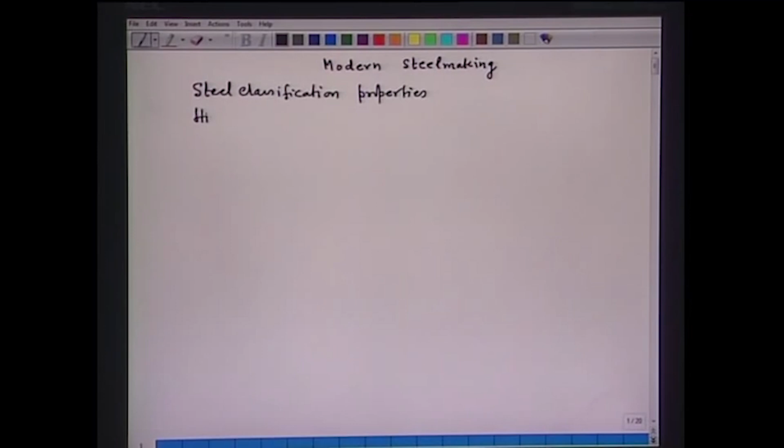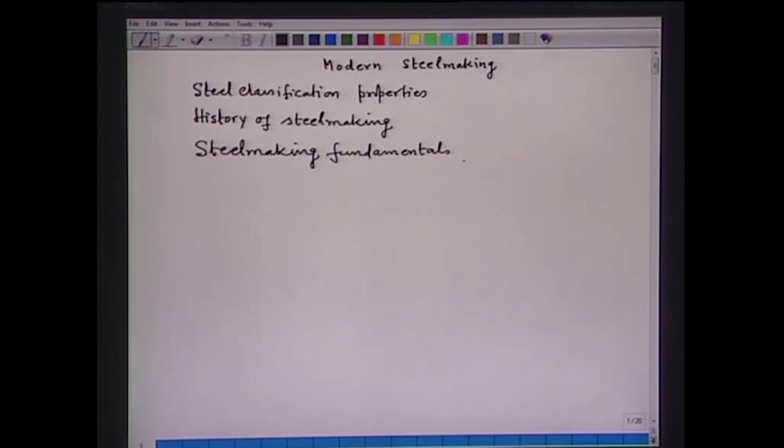I will be lecturing on modern steel making. The lecture will essentially comprise of steel classification, properties, history of steel making, which will be followed by steel making fundamentals, and after covering steel making fundamentals, I will be covering practice of steel making. In practice of steel making I will be covering oxygen steel making, and subsequently electric arc furnace steel making. So, this will be the organization of the various lectures that I will be delivering to you.

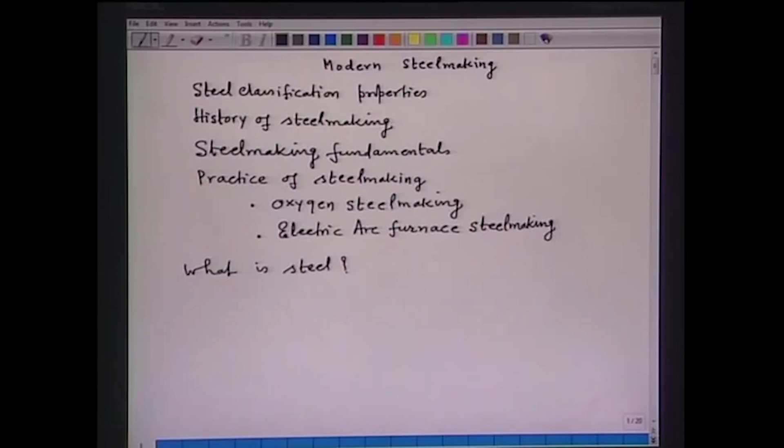So, as such I will be starting first of all to tell you what is steel. The whole idea is that you can appreciate the importance of steel in the modern economy. Now, the first point is that steel is an alloy of iron and carbon.

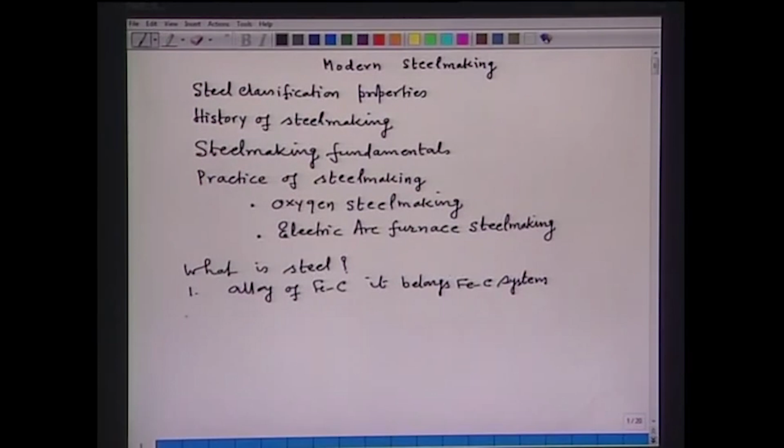Steel belongs to the iron carbon system. Now, this iron carbon system has a unique property.

Of alloying with several elements of the periodic table. With that I mean that there are elements like cobalt, nickel, chromium, vanadium, tungsten, molybdenum, and name any other element. This iron carbon system has the capability to have some solubility of that element, and it imparts an altogether different property in the steel, or you can call it altogether a different material.

Third, this iron carbon system is also capable of creating different properties by altering microstructure through heat treatment and deformation processing. So, this is somewhat a very unique property that this iron carbon system has.

I repeat once again, iron carbon system is capable of creating any desired service property by altering microstructure through heat treatment and deformation processing. So, this is somewhat a very unique property that this system has.

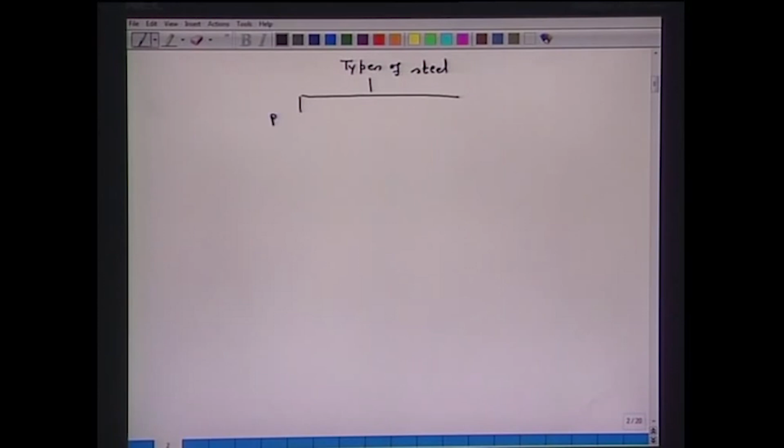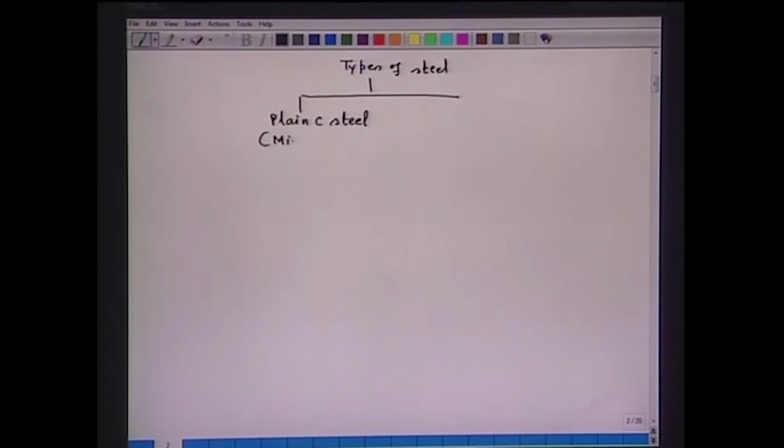So, types of steel - essentially we can classify in two broad categories. The first is plain carbon steel. Plain carbon steel is also called by the name mild steel, or sometimes it is also simply called carbon steel. The other is alloy steels.

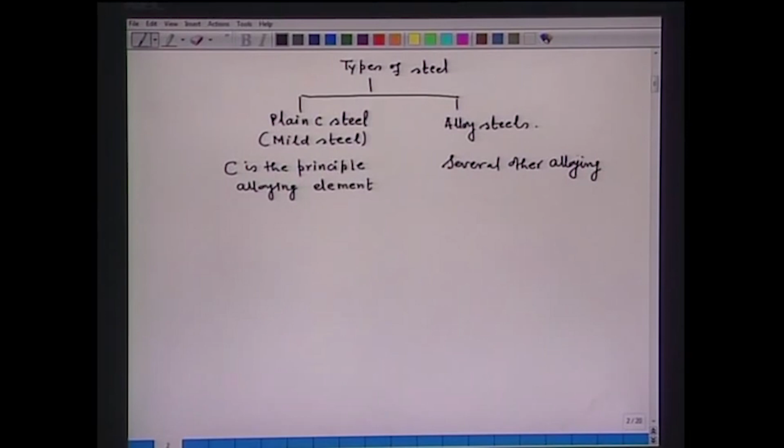In plain carbon steel, carbon is the principal alloying element. In case of alloy steels, they also contain carbon, but besides carbon, the alloy steels have several other alloying elements like cobalt, chromium, nickel, molybdenum, tungsten, vanadium, etc. All these alloying elements are added in order to get a special property for a particular application.

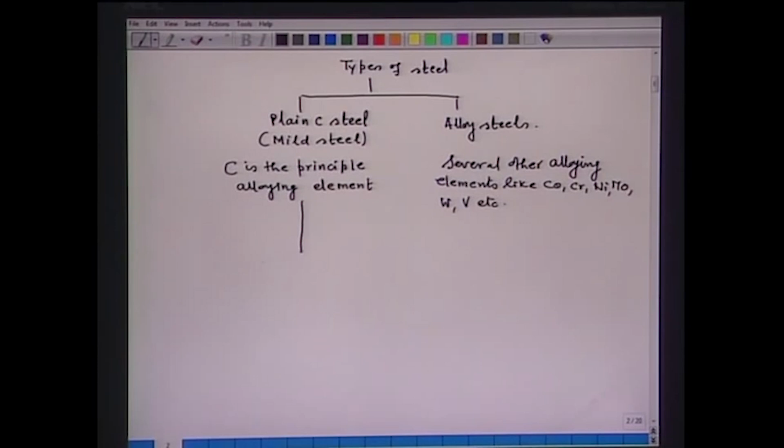Now, let us further classify the plain carbon steel. So, plain carbon steel we can classify based on the carbon content. So, first of all we have low carbon steel. In the low carbon steel, carbon content is less than 0.25 weight percent.

Now, the property that these steels have - they possess excellent ductility and toughness. They are also weldable and machinable. But a little bit of a disadvantage is that they are not amenable to martensitic transformation.

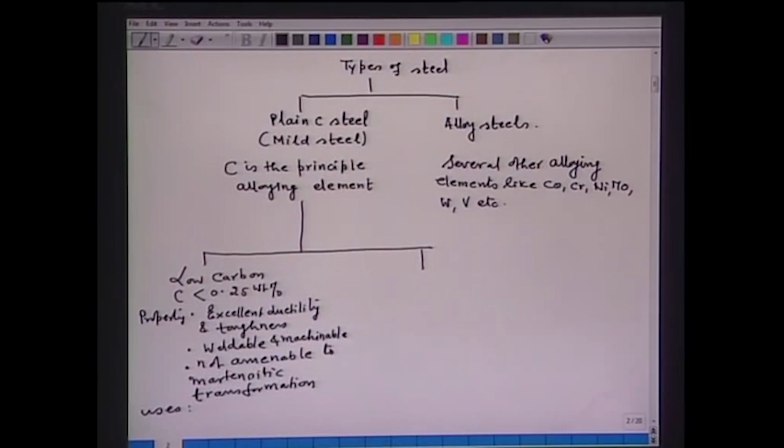Now, as regards uses, these low carbon steels are commonly used in industrial products like bolts, nuts, sheets, plates, and products derived from there. Another important type of plain carbon steel is the medium carbon steel. In the medium carbon steel, carbon is in between 0.25 to 0.6%, that is, weight percent.

Now, among the properties, these steels have low hardenability, and a very important property that these medium steels possess is that they can be heat treated.

They can be heat treated. What does it mean? As I said in the beginning, showing the importance of steel, the iron carbon system is capable of creating unique properties by altering microstructure through heat treatment and deformation processing. So medium carbon steel, if it can be heat treated, you can get from one type of steel several different steels by simply heating and cooling at different rates. That is the important advantage of medium carbon steel, and as a result several important mechanical or service properties can be induced in the material.

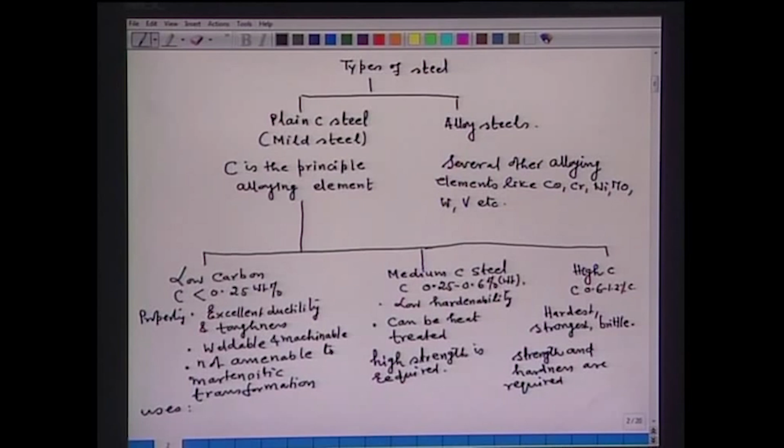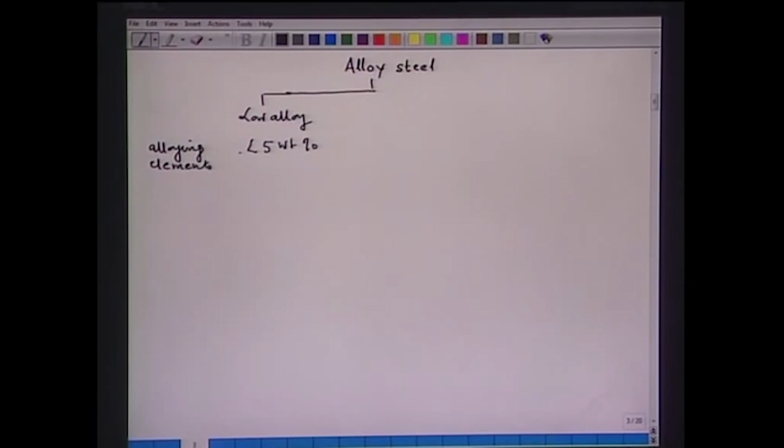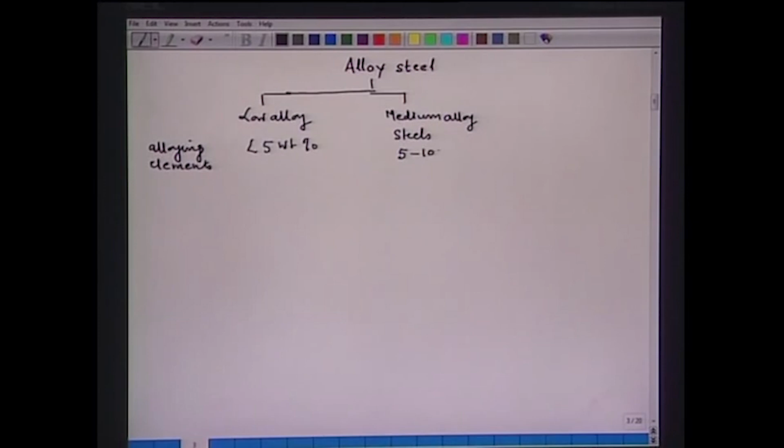Now let us see the classification of alloy steels. Among alloy steels, we have low alloy steel, where the alloying elements are less than 5%. Then we have medium alloy steels, where the alloying elements vary from 5 to 10%. And then we have high alloy steels, where the alloying elements are greater than 10%.

Now these alloying elements are added to improve properties like hardenability, strength, toughness, wear resistance, and to provide, for example, stainless property. For example, addition of chromium gives you stainless steel, etc.

So now remember, all these alloy steels also have carbon content, which may vary. Low alloy steel may have 0.2, 0.3% carbon, and accordingly carbon content is present in all alloy steels.

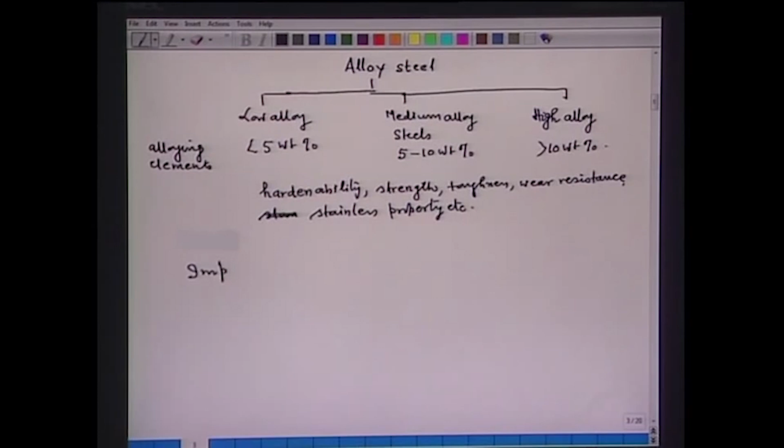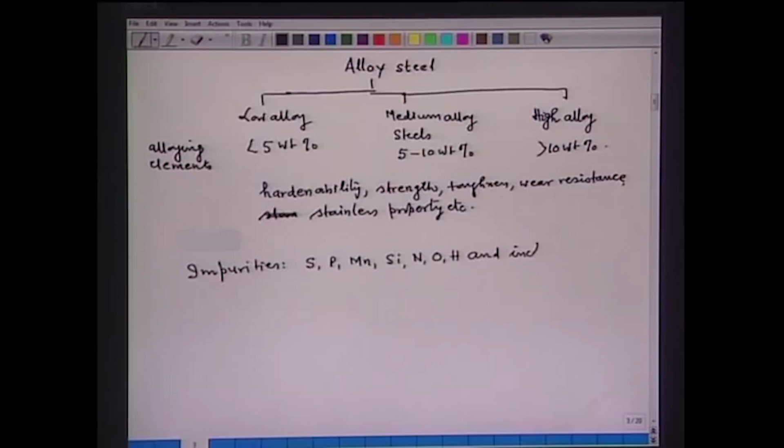Now, whether we have plain carbon steel or alloy steels, all steels contain impurities like sulfur, phosphorus, manganese, silicon, nitrogen, oxygen, hydrogen, and inclusions. These impurities originate during the steel making stage, because when you produce steel from hot metal or pig iron, these impurities are carried over to the steel. Partially we can remove them while converting hot metal to steel, but still these impurities enter through the steel making stage.

So what is required is that their content must be controlled for a given application, because these impurities cannot be tolerated in large quantity. Certain applications require strict control over the presence of these impurities. Let me give some examples: I'll put application, then tolerable impurity level, and then maximum size of inclusion. These are just a few examples — the rest you can see from the books and build your knowledge.

Say, for example, steels for bearings — they can tolerate total oxygen less than 10 ppm, and inclusion size should not be greater than 15 micrometers, which is very small.

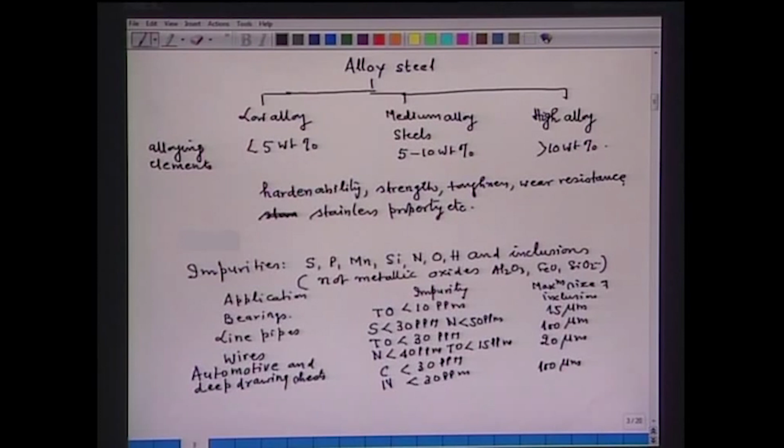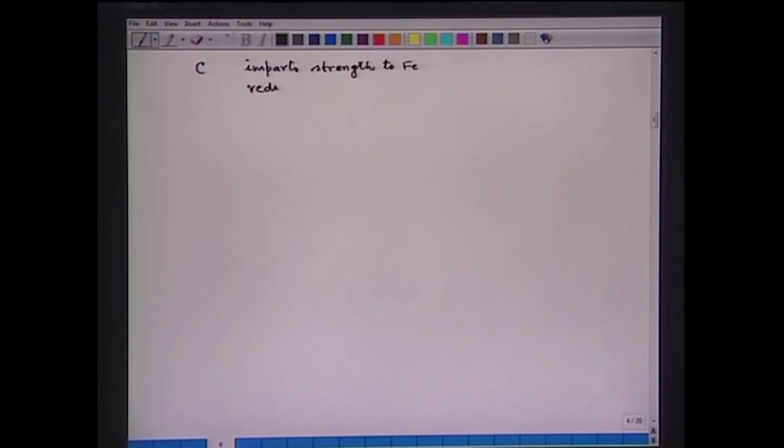Now, in general, if we want to explore the effect of impurities on mechanical properties, since ultimately this steel will be put into application: carbon imparts strength to iron. Remember, pure iron is very ductile and is not useful for any application. But at the same time, carbon reduces ductility and impact strength.

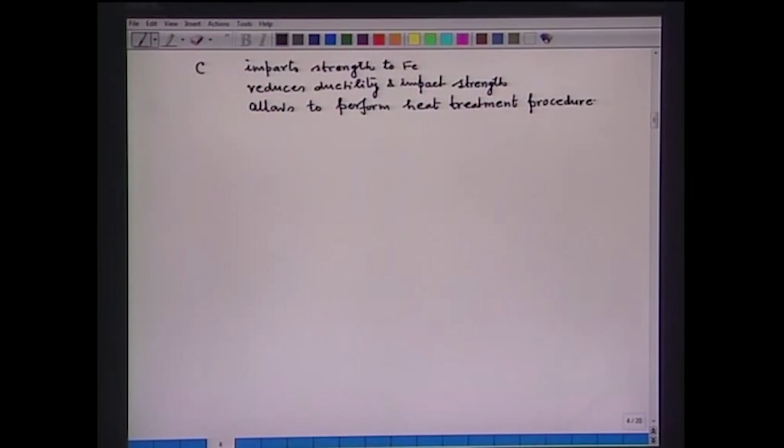A very important property that carbon has is that it allows us to perform heat treatment procedure. Heat treatment is one of the main technologies to alter the microstructure of the steel and hence to create a different material.

Now regarding another impurity, sulfur. Sulfur essentially causes hot shortness, due to the presence of FeS at the grain boundary. FeS has a melting point of 989 degrees Celsius. So when sulfur containing steel is subjected to deformation processing, we have to heat it, and most deforming processing operations require steel to be heated above 1000 degrees Celsius. In that case, the FeS, if present at the grain boundary, will melt and create a lot of problems, and that is called hot shortness.

Now, the formation of this FeS can be understood by considering the coefficient of distribution of sulfur between solid and liquid. When steel solidifies, the sulfur segregates, because the distribution coefficient, also called segregation coefficient, equals percent sulfur in solid upon percent sulfur in liquid, and this value is around 0.02.

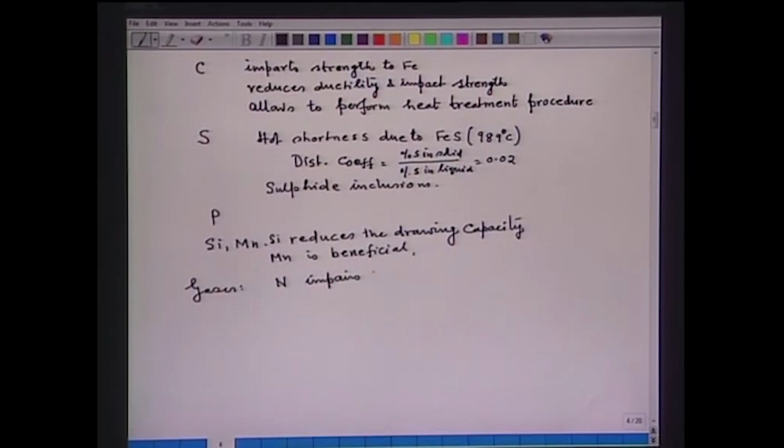The presence of gases, for example nitrogen, impairs plastic properties. Then hydrogen causes defects such as flakes, etc. The presence of oxygen forms oxide inclusions.

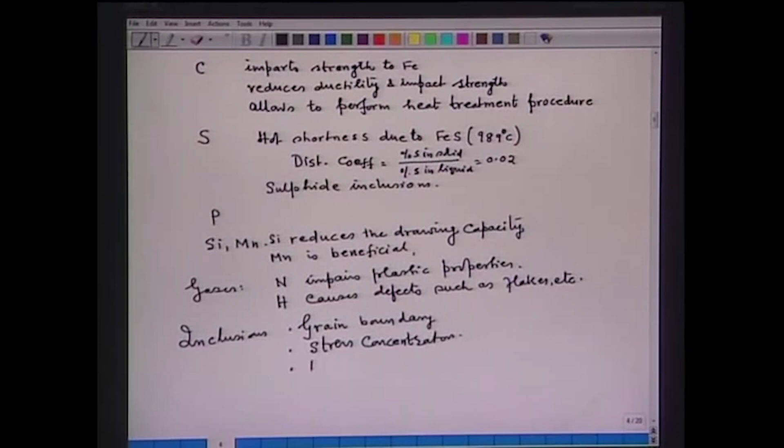So the next important thing is inclusions. They are present at the grain boundary. If present there, they weaken the intergranular bonds. Second, inclusions also act as stress concentrators. Also, some types of inclusions are brittle. So what happens if you roll them? Brittle inclusions will crack and accordingly you will get cracks. So these are some of the deleterious effects of impurities on the properties of steel.

There are several other effects on mechanical properties. I will request you to go through the books and make yourself up to date.

Now, in some steels which are produced from scrap, sometimes tramp elements are also present, and these tramp elements are very harmful because they have very low melting points. For example, copper, tin, antimony, lead, zinc - they are all called tramp elements, but their source in steel is from the scrap. So having known an overall bit of steel classification and impurities, now let us pursue the history of steel making.

That is, now we have to produce it, and the history of modern steel making. In 1856, Henry Bessemer developed a process for bulk steel production.

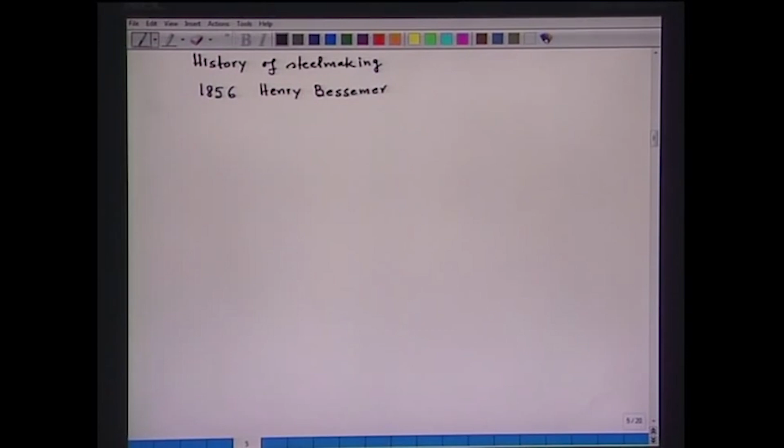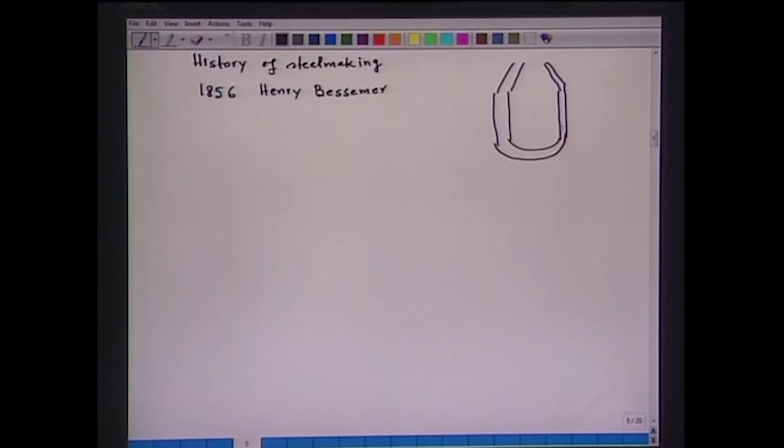No heat was supplied from outside, because he knew that most of the refining reactions are exothermic in nature. What he did was construct a pear shaped vessel lined with acid refractory material, and through the bottom of the vessel he blew air into the metal.

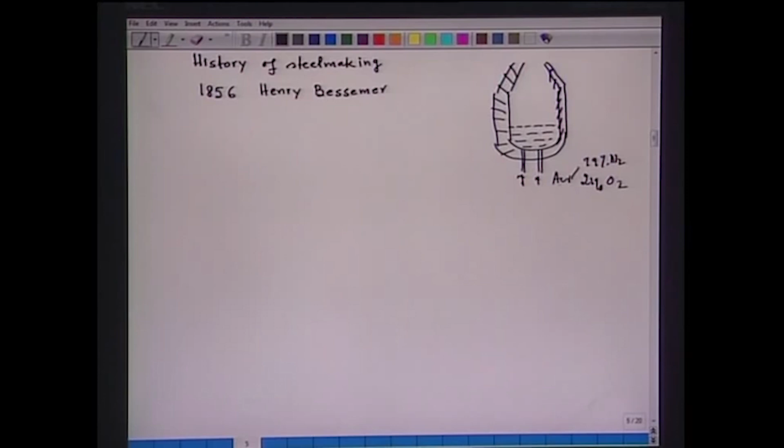So through the bottom he blew air, and air contained 79% nitrogen by volume and 21% oxygen by volume. As a result, reactions between iron, carbon, silicon, and manganese proceeded, and he was able to produce steel from hot metal. What was the problem he faced? He could not reduce the phosphorus content of hot metal, because of the acid lining he had put in the vessel.

This is the acid lining and this is the hot metal. By virtue of the acid lining, it was not possible to remove phosphorus. So the problem faced was that sulfur and phosphorus could not be removed, and the oxygen content of steel was also very high.

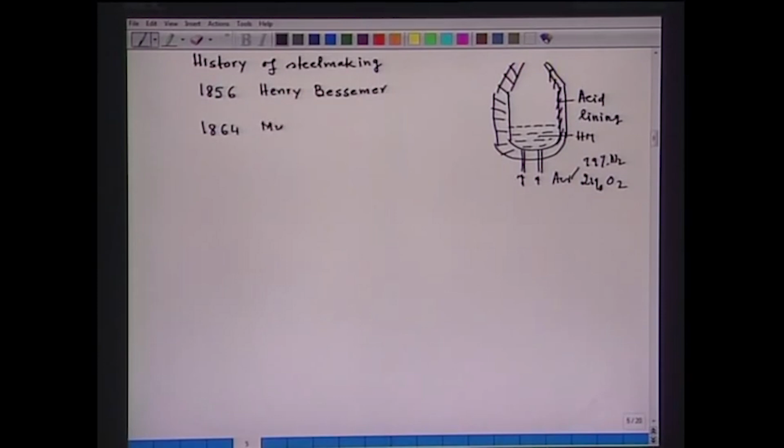Around 1864, Mushet developed an iron manganese alloy. With this development, it became possible to reduce the oxygen content of steel.

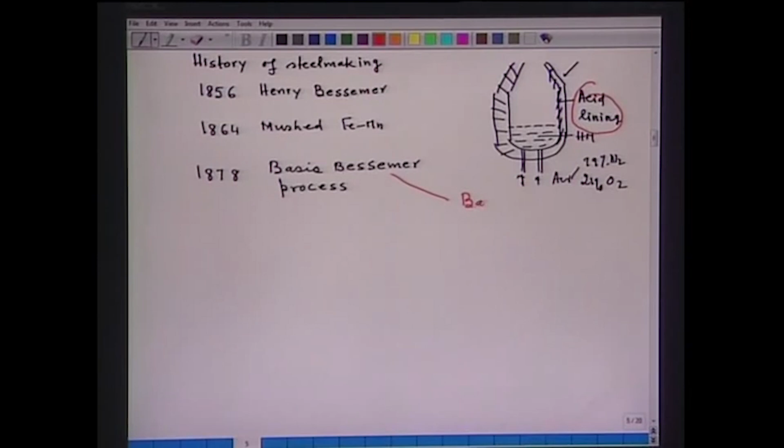Around 1878, a basic Bessemer process was developed. The essential difference between the two: the shape of the vessel is the same as shown. All that was done was, instead of acid lining, the basic Bessemer process employed basic lining. That was the only difference. As a result of the basic lining, it became possible to remove phosphorus from the hot metal. So with the advent of the basic Bessemer process of steel making, it became possible to reduce phosphorus also.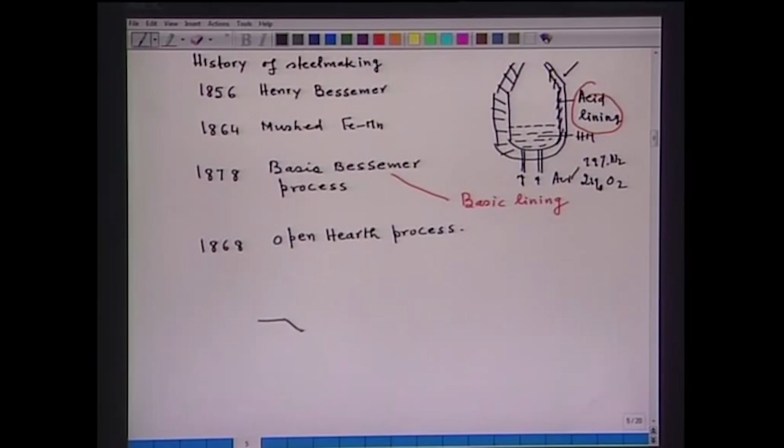Around 1868, the open hearth process was developed. It has a very shallow refractory lined tray. Let me try to draw this. So the shallow tray, this is the refractory lining.

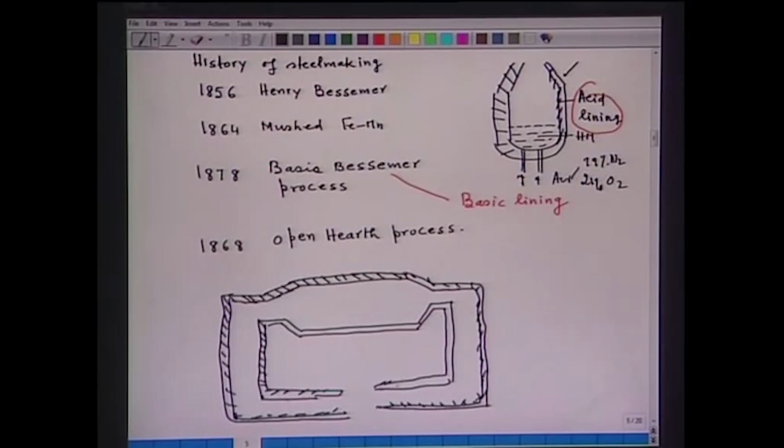All the refractory lining here, acid lining or basic lining, both were used in open hearth. So this I will put as a refractory lining. This is the roof, and from here is the provision for injecting fuel, that is an oil burner. Somewhere here you have the metal, and here is the slag. This I will call the hot metal.

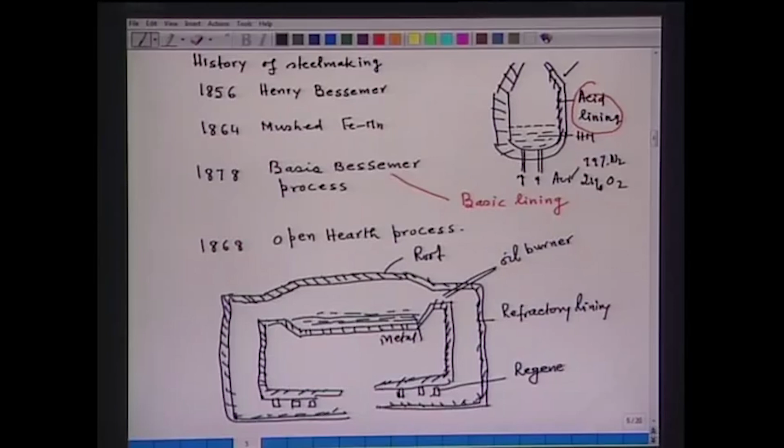These are the so-called regenerators, used to preheat the air, and here was an air valve. This is the valve for reversal. In one cycle, here goes preheated air, then here exhaust gases go out. So one regenerator is on the heating side, another on the cooling side. When on the heating side, preheated air passes through this, and exhaust gases go through the other outlet. That was the whole idea of employing two regenerators.

So the essential feature of this open hearth process is that it was a shallow refractory lined tray with a roof over it, and the charge for this. Since heat was being supplied from outside, as seen in the oil burner, the charge consisted of steel scrap plus hot metal plus iron ore plus lime. It was introduced through the doors. Source of heat was combustion of gaseous and liquid fuels.

Since it was possible to use an outside source of energy, any amount of scrap could be melted, so the process was highly flexible. The time was around 6 to 8 hours. This open hearth steel making dominated steel production for a very long time, because though the basic Bessemer process solved the problem of phosphorus content of steel, the nitrogen content of steel was still very high. Because of this, though people used basic Bessemer in those periods, open hearth process was still predominantly used.

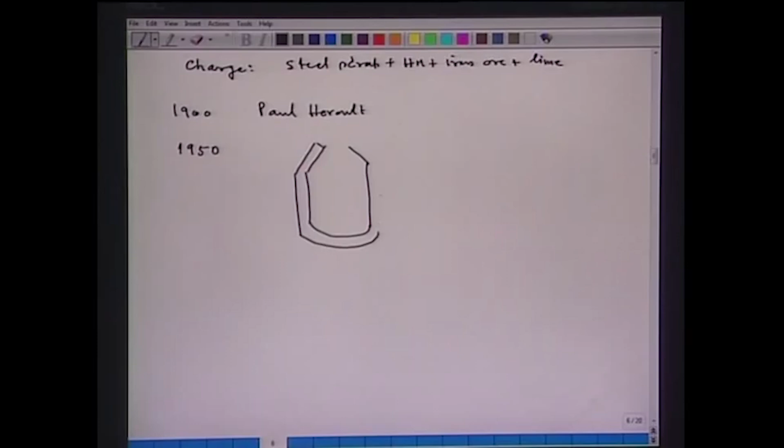In 1950, at Linz and Donawitz, a process was tried wherein, in a pear shaped vessel with this refractory lining, this is the hot metal, oxygen was blown from the top. Pure oxygen was blown from the top, and this converted hot metal to steel. This technology revolutionized the steel industry because it was highly flexible. There was no problem with the plugging of the bottom tuyeres as there was in basic Bessemer. The only problem is that in the beginning they used mild steel as the material of the lance, which was melting, but later development took place, and this process became the modern steel making.

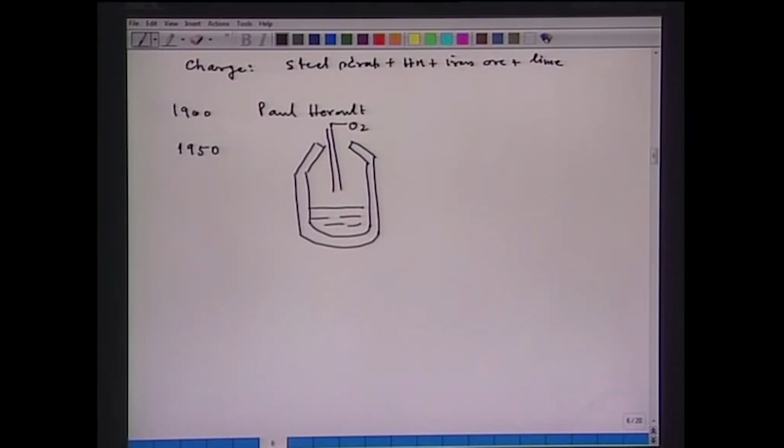Parallel to these developments, the ladle was also explored for use as a reactor, and as a result several secondary steel making processes also came into existence.

There were a large number of secondary steel making processes developed around the 1960s, and in the 60s this top blown oxygen steel making was also converted to top and bottom blowing steel making. That is how the modern steel making through top and bottom blowing has come into existence.

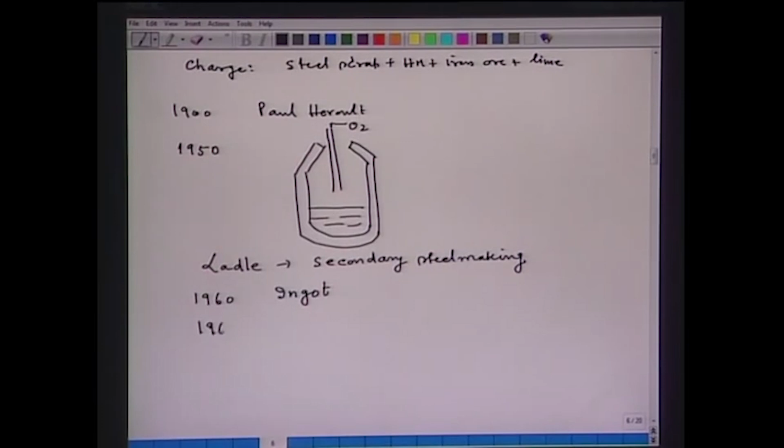For more than 150 years, till 1960, ingot casting was the predominant route for casting liquid steel. Around 1960, continuous casting of steel was developed, and this has also revolutionized the steel industry.

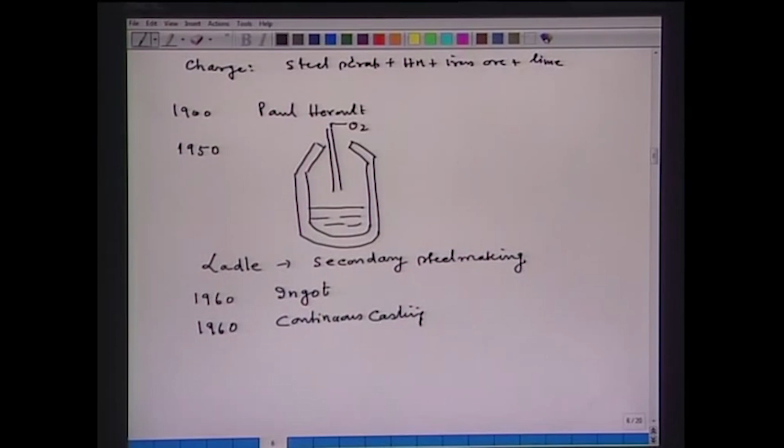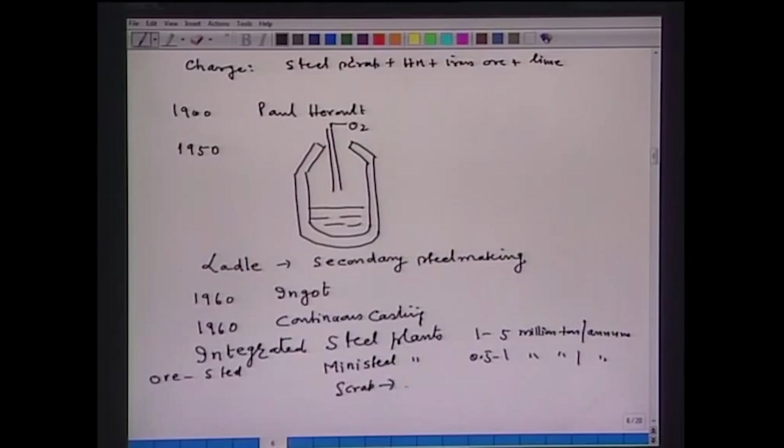The present status of steel industry comprises integrated steel plants, whose capacity may vary from 1 to 5 million tons per annum, and mini steel plants, with capacity ranging from 0.5 to 1 million tons per annum. The essential difference is that an integrated steel plant starts from ore and produces steel, whereas a mini steel plant mostly uses scrap to produce steel.

We have long products and flat products, both of which are being produced. Now, a rough idea of world steel production.

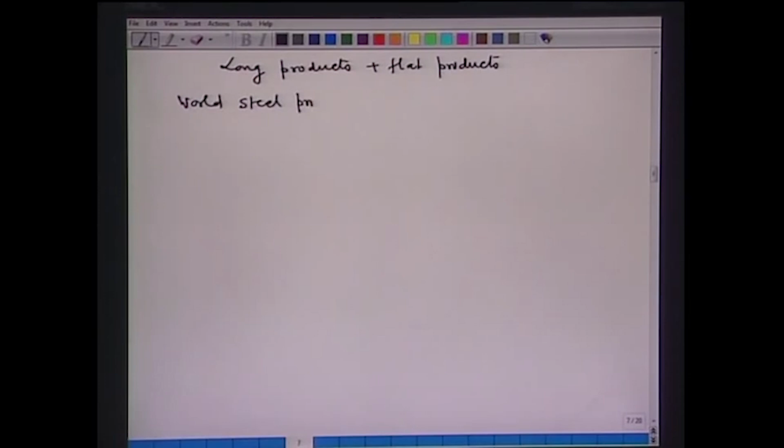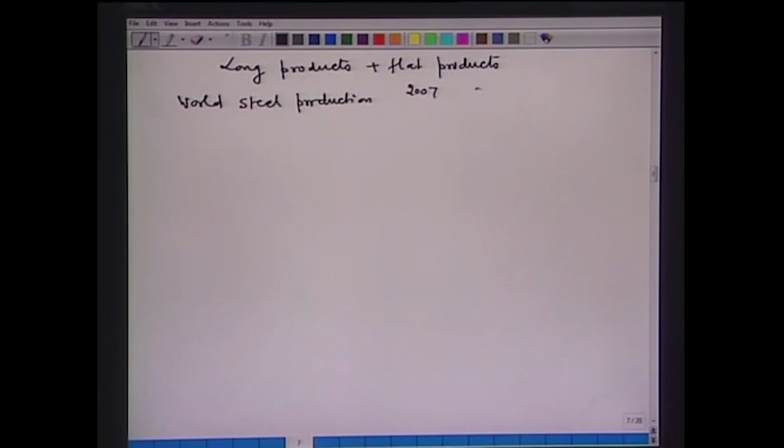World steel production: in 2007 we had 1.3 billion tons. In 2008 it rose to 1.42 billion tons. The expected projection for the year 2011 is around 1.6 billion tons.

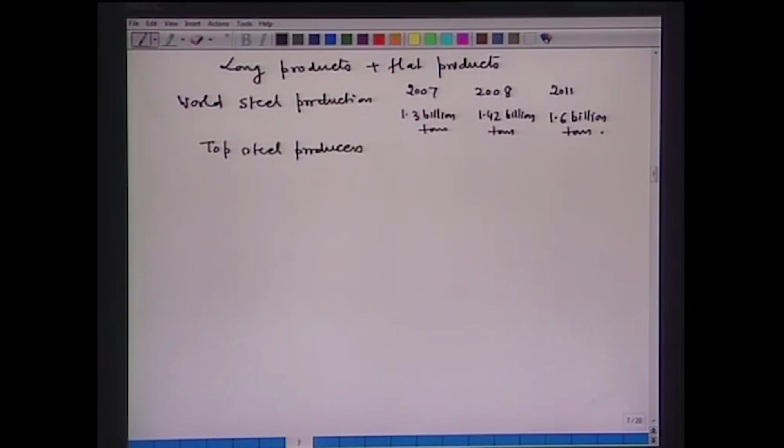Some of the top steel producers: ArcelorMittal, data for 2007, produced 116.4 million tons and ranked number 1. Then second was Nippon Steel, which produced 35.7 million tons and ranked number 2.

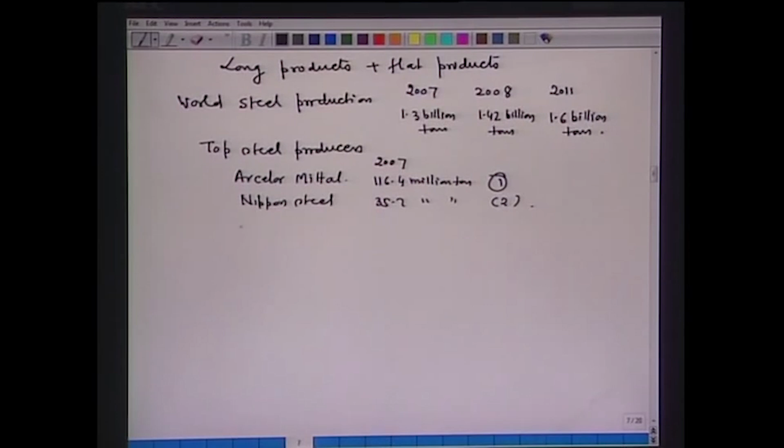POSCO, which is in Korea, produced 30.1 million tons and ranked number 4. Tata Steel produced 26.1 million tons and ranked number 8. SAIL, Steel Authority of India Limited, produced 13.9 million tons and ranked number 21. Voestalpine, which is in Austria, produced around 6.9 million tons and ranked around number 43.

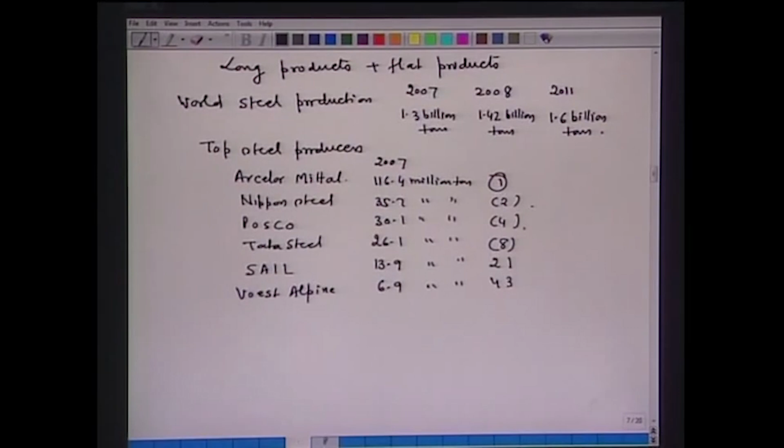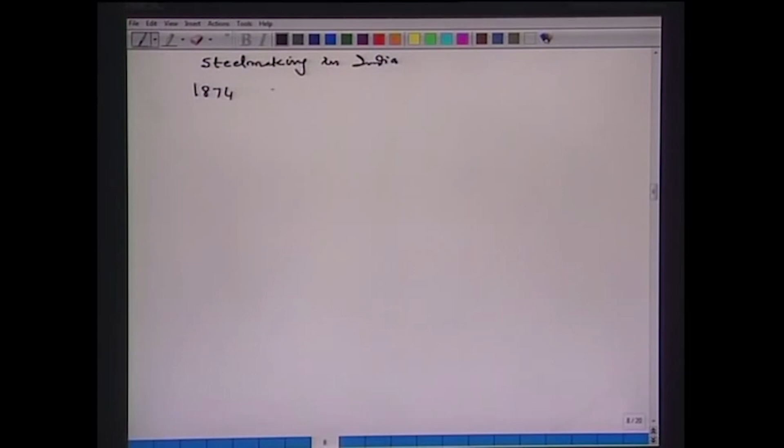Now, following a brief historical background of steel making in India. The first attempt to produce steel in India was made in 1874 when Bengal Iron Works came into existence.

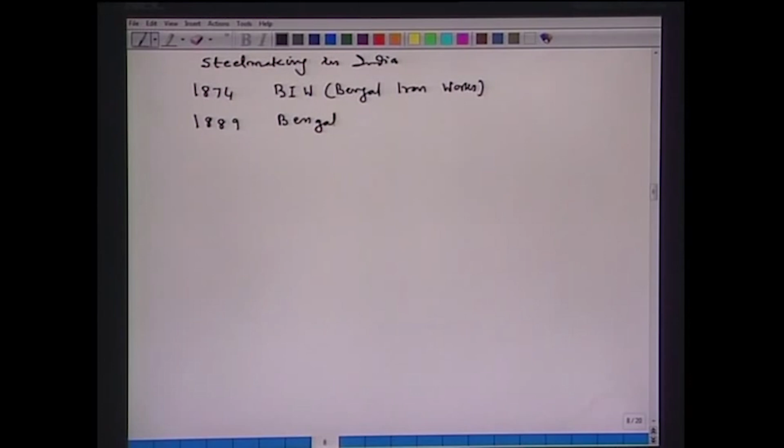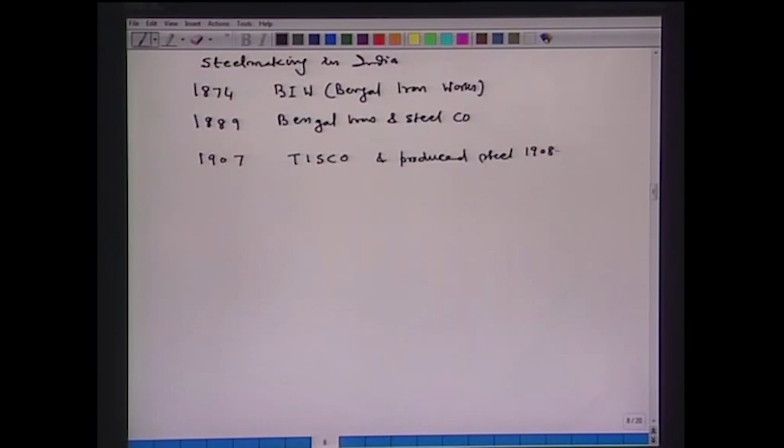In 1889, Bengal Iron and Steel Company acquired BIW and continued to produce steel until it was taken over by ISCO in 1936. In 1907, Tata Iron and Steel Company was formed by Jamshedji Tata, and produced steel in 1908-1909. In 1918, the Mysore government decided on a steel plant at Bhadravati.

In 1953, through the vision of Pandit Jawaharlal Nehru, an integrated steel plant in the public sector at Rourkela, with German collaboration, came into existence. Since then, Bhilai was added in Madhya Pradesh, then came Durgapur, then came Bokaro, and then came another steel plant in Visakhapatnam.

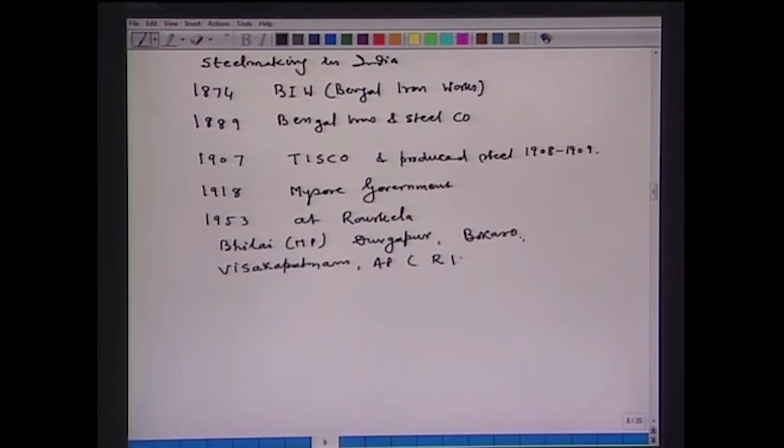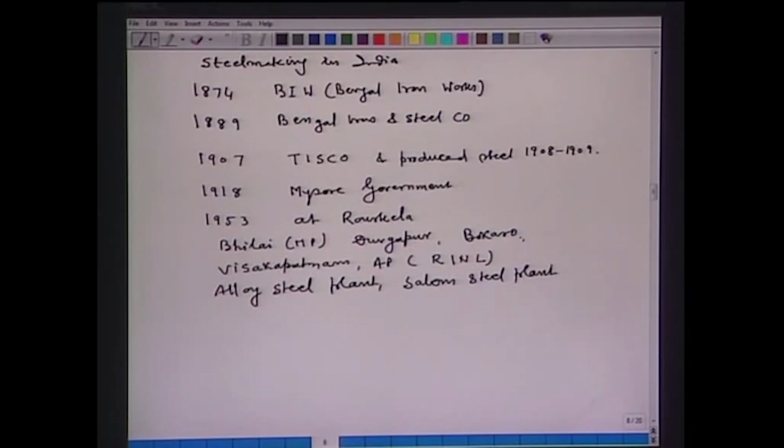Visakhapatnam in Andhra Pradesh came under Rashtriya Ispat Nigam Limited, RINL. Then also came the alloy steel plant at Durgapur and Salem steel plant were also added. The Indian steel industry is organized in 3 sectors.

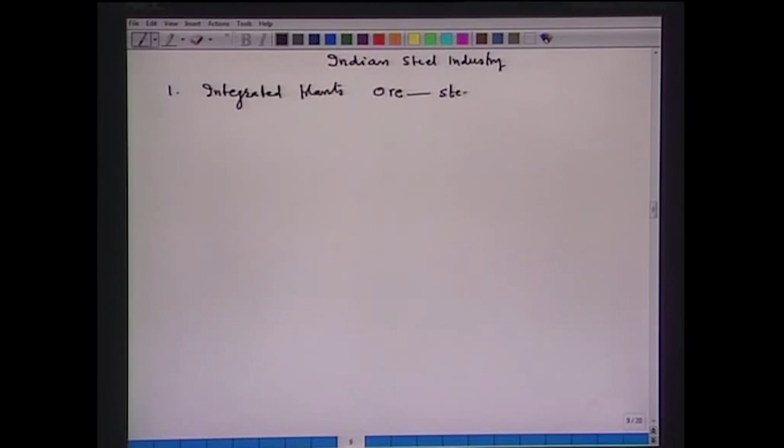The Indian steel industry is organized in 3 sectors. First, integrated plants, which use ore and produce steel. These integrated steel plants exist in the public sector and in the private sector.

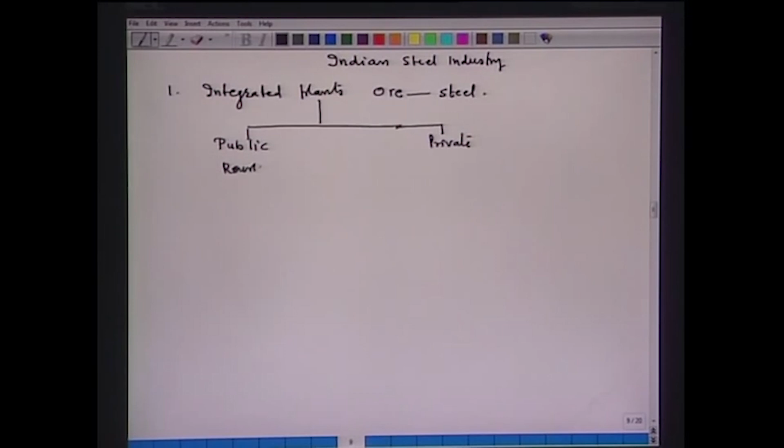In the public sector, as already mentioned, we have Rourkela, then Bhilai, Durgapur, Bokaro, Salem, the alloy steel plant at Durgapur, then Visvesvaraya Iron and Steel Plant at Bhadravati, and Indian Iron and Steel Company at Burnpur. All of these come under the company called SAIL, Steel Authority of India Limited.

Another organization is RINL, Rashtriya Ispat Nigam Limited, under which comes Visakhapatnam Iron and Steel Works. In the private sector we have, for example, TISCO, Tata Iron and Steel Company. Then Essar Steel Plant, Ispat Industries, Jindal Steel Plant, Jindal Steel and Power Limited, and so on. This is the integrated sector.

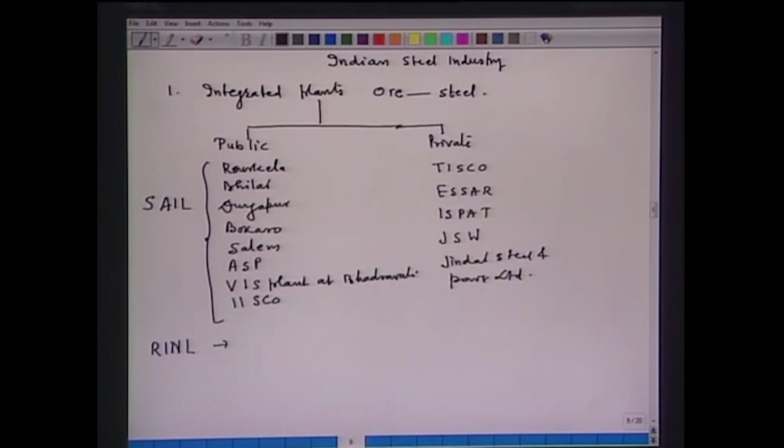Another sector is the mini steel plant, which uses scrap and produces metal. There are several mini steel plants; I will just mention a few: Uttam Steels, Kalyani Steels, Mukund Limited, Usha Martin, etc. You can add a few more to update yourself. This is the second type of sector.

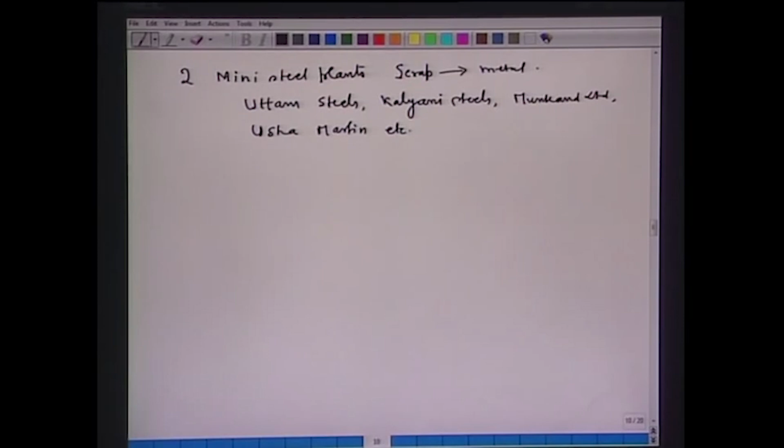This is the second type of sector. The third sector, which has grown very fast in the last 10-15 years, is the induction furnace sector.

Now, this sector uses scrap, the same thing, scrap and produces steel. This particular sector is dispersed all over the country.

Now, in India, say in 2007, India produced 53.1 million tons of steel. In 2008, it produced 55.2 million tons of steel.

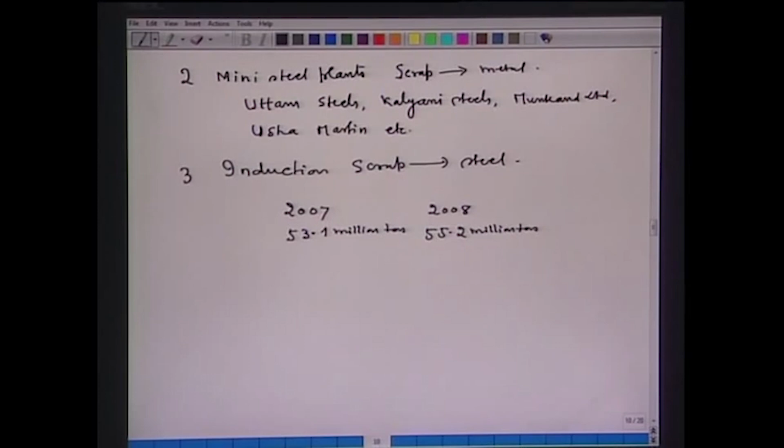Then POSCO and Mittal, each will add 12 million tons capacity additional. TISCO will add around 28 million tons additional capacity.

If you want further detail, you can see the article by A. Chatterjee. It gives various other details on iron making and steel making. Ironmaking and Steelmaking, volume 36, number 7, 2009, page 491. So there you can find several other details.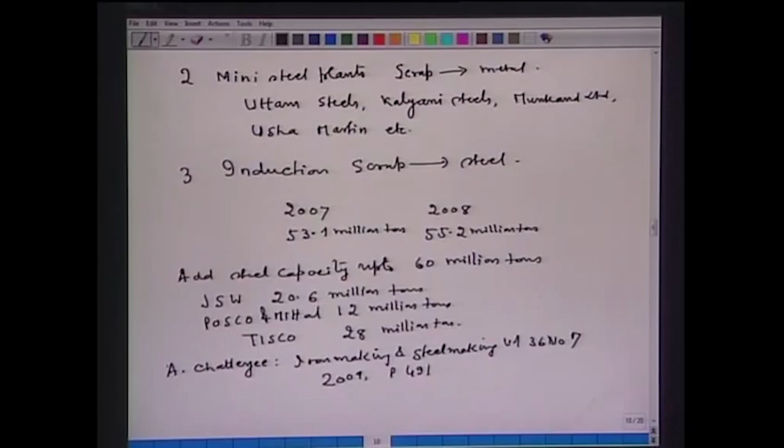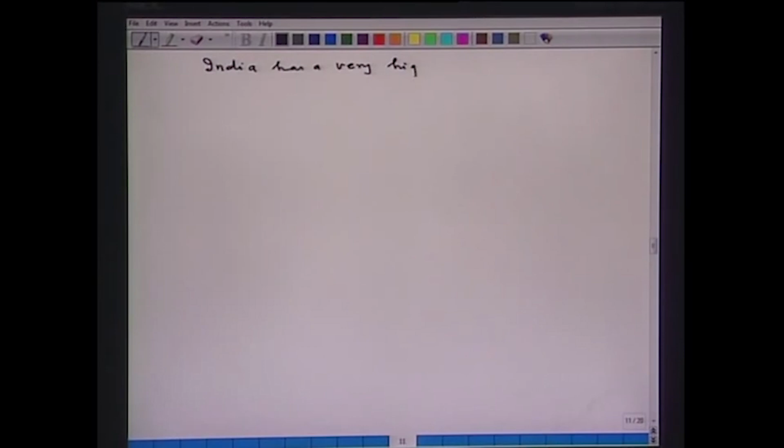India has a very high growth potential for steel. India has a very high growth potential. Why?

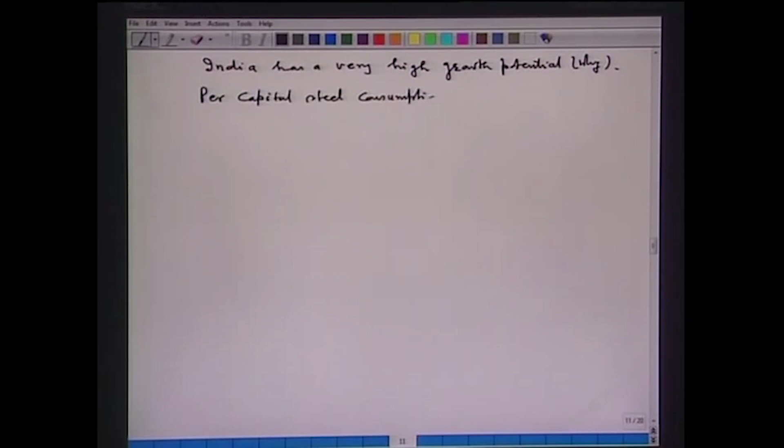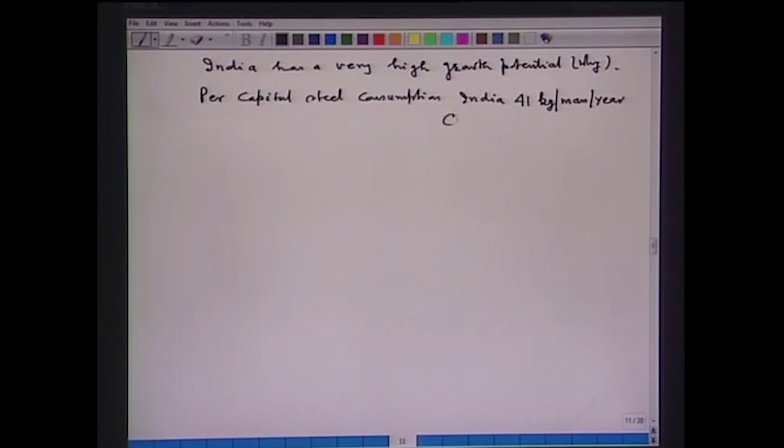The first reason is per capita consumption of steel, per capita steel consumption, which is considered to be a sign of prosperity. India: 41 kg per man per year. China: 271 kg per man per year. USA has 404 kg per man per year.

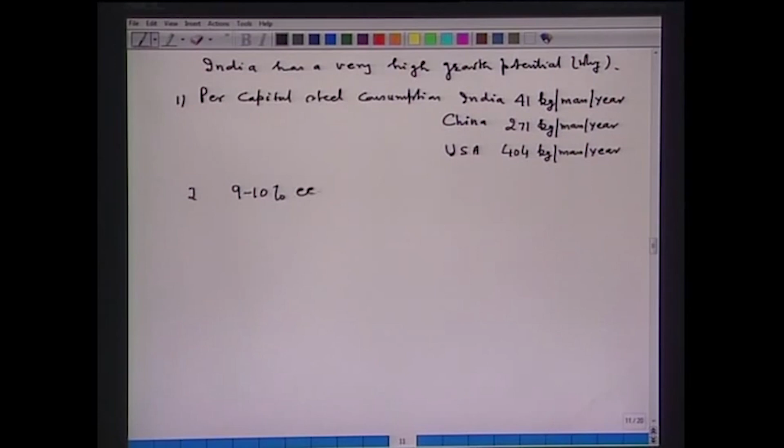That's the one reason. Second reason is that it is expected a very high economic growth. We expect around 9 to 10% economic growth in the near future.

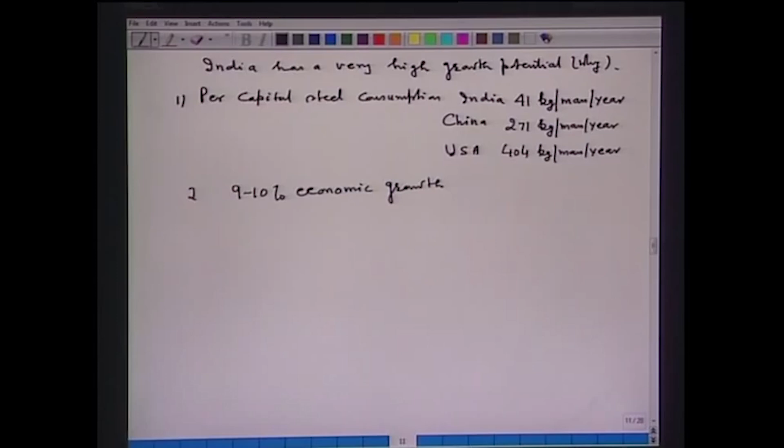Now, this calls for tremendous infrastructure growth like building of bridges, roads, railways, airports, highways and what not. So, as such, India has a very high growth potential of steel because of these two reasons. If you have other reasons, please add it, and see that India has a very vast scope for growth of the steel industry. So, there is going to be a huge demand of steel in the years to come.

As per some estimate, by 2030, India will be needing 300 million tons of steel. However, it is an estimate.

Now, to conclude this lecture, technology of steel production has made rapid strides in the last few decades. As a result, open hearth furnace and basic Bessemer remain only of historical importance. Today, to my knowledge, none or very few plants in the world are producing steel either by open hearth or by basic Bessemer in its original version.

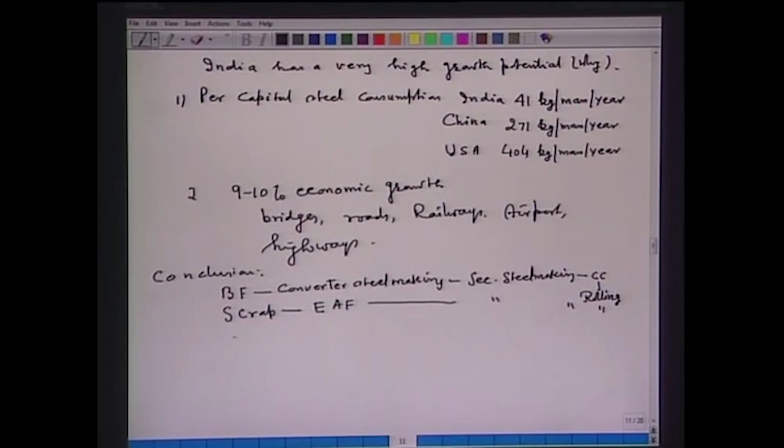Another route is that scrap goes into electric arc furnace, then secondary steel making, continuous casting and rolling. Hereafter the route is the same, and this is the route followed by the mini steel plants of the world, including India. Another route is also followed by using scrap in the induction furnace, and then the manufacturer may sell ingot as such, or it may go to secondary steel making or continuous casting and rolling.

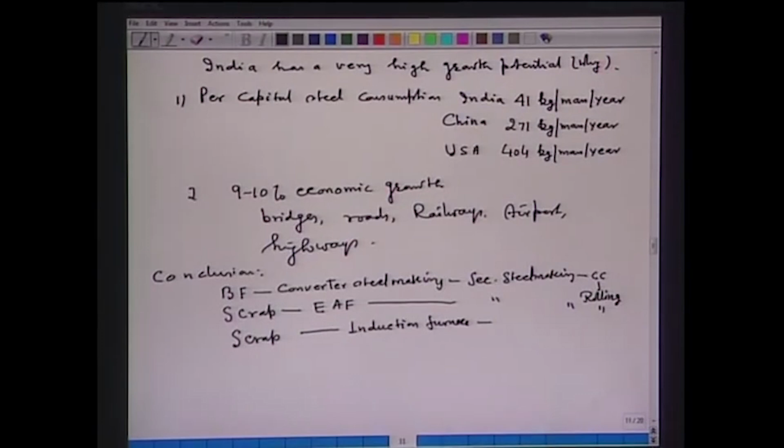So, it depends. So, in conclusion, the modern steel making comprises of either blast furnace, converter steel making, secondary steel making, continuous casting and rolling, or scrap, electric arc furnace, and so on. So, as such, we will be concentrating on the converter steel making and electric arc furnace.

Now, before I finish this lecture, I would like to give you certain questions for your self assessment. So, I am writing certain self assessment questions.

First question is, why does steel emerge as an important engineering material?

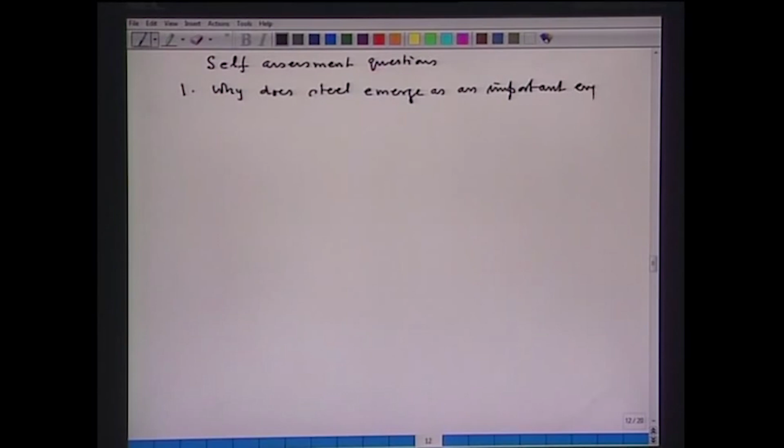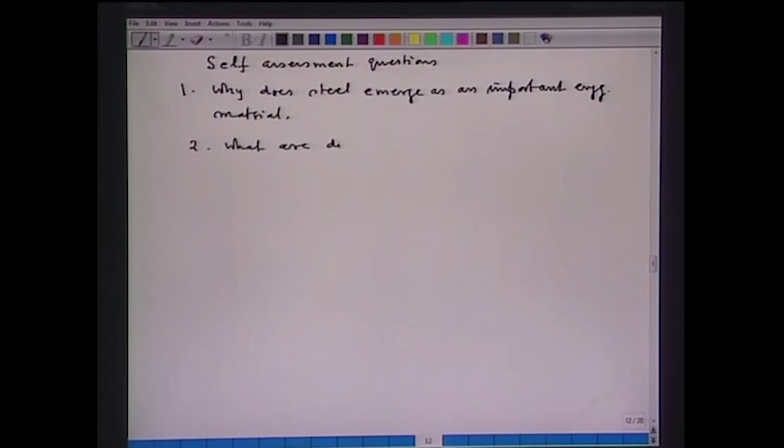Second question is, what are different types of steel? Name them and mention a few applications.

Third, name the different integrated steel plants in India. Mention their capacities and type of products.

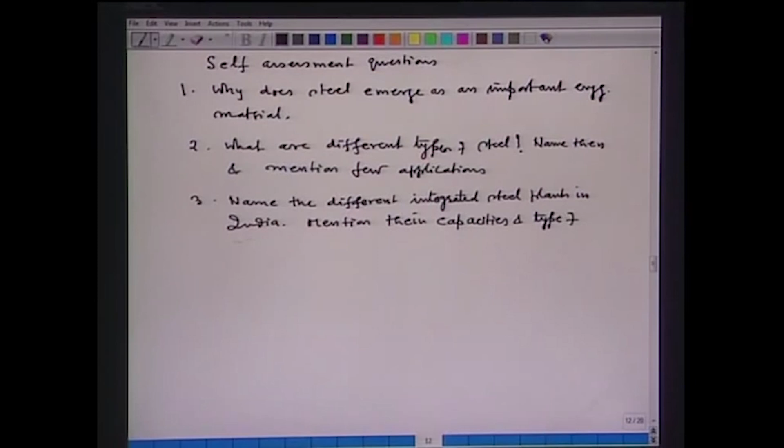Fourth, do you agree that India has a vast potential for steel growth? Justify.

Fifth, learn the iron carbon diagram and understand the importance of phases in developing steel properties.

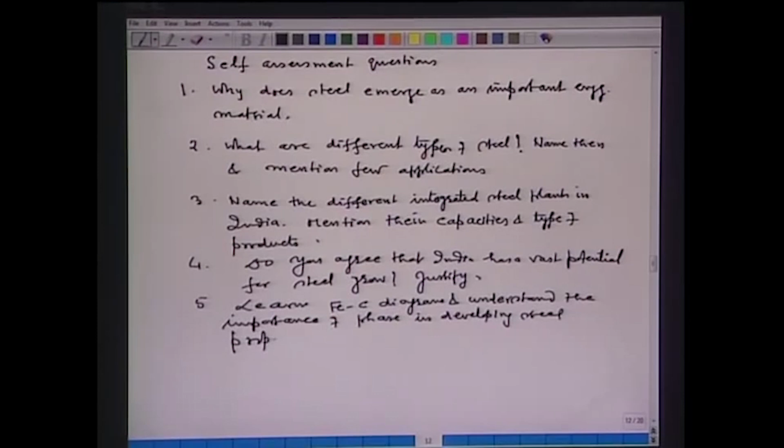Now, the last thing I would like to give you a few references for further reading. You can consult, one, the book by R.H. Tupkary and V.R. Tupkary, Modern Steel Making, sixth edition, or any edition, because I followed the sixth edition.

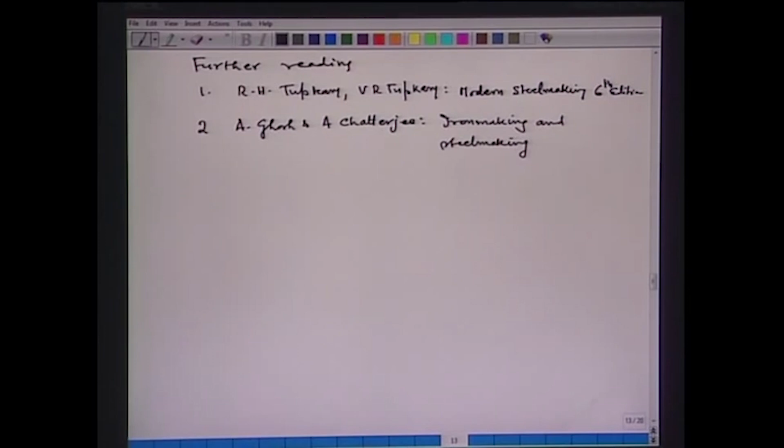Second, you can also consider A. Ghosh and A. Chatterjee, Iron Making and Steel Making. That is the end of the lecture.